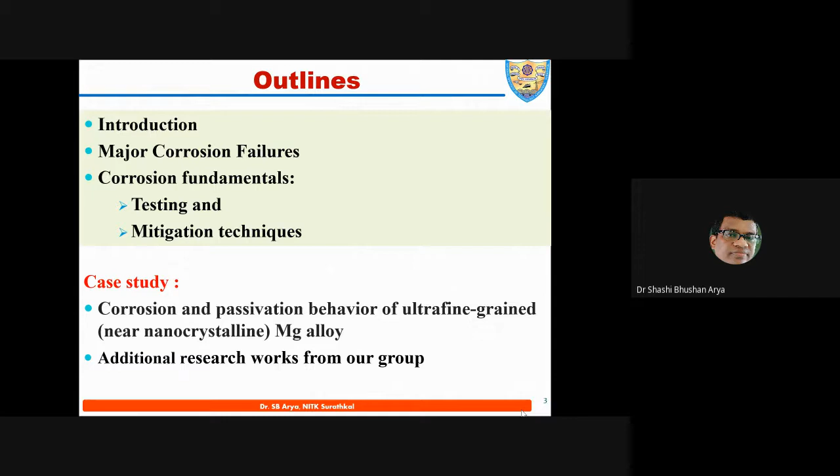So the first part is the introduction. I'll try to make you more interested. Please forgive me, not everything is from the magnesium corrosion point of view. I am giving you more iron free of cost. Iron is equally important as magnesium. People talk too much about magnesium. Magnesium is very demanding, no doubt.

Everybody is working in the metal area. Magnesium is very demanding, a hot cake nowadays, for various reasons already given by the previous speakers. I will talk about it a little later, but I would like to correlate the corrosion problem of magnesium with respect to iron, why we are still using iron. I'm trying to connect both.

When I'm giving the example of corrosion of iron, it means corrosion of magnesium in a similar way when you talk about the science or technology point of view. So first part, NITK Surathkal, as I told you, is very close to the Arabian Sea. Okay, and we have our own beach. Those who have visited this place know one of its beauties is our own beach. But I'm not going to share about the beach; I would like to share about the corrosion perspective.

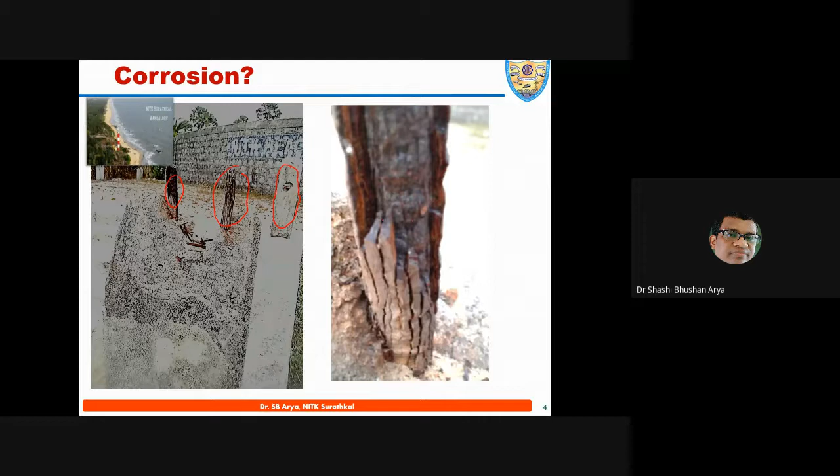So in this particular case, the steel, because you know that a concrete structure is basically a composite structure. Concrete means cement and other admixtures, and then we put in the steel called TMT, thermomechanical treated steel. And this is the TMT steel. You can see the brown color if you go closer, and this has typically got corroded. So steel is really challenging for the industry and the society.

But you know what is the best part? This particular steel is very economical. We cannot compare steel with magnesium alloy. Steel is around 50 rupees per kg, or say 100 rupees per kg even if you go for good quality, but you are not going to get magnesium alloy at 100 rupees per kg or even 1000 rupees per kg. So most of the time, society uses steel or modified steel, and that's why we have more examples of steel corrosion, and you mostly don't see corrosion of magnesium in real life. Components are there, they are failing, so we will discuss it a little.

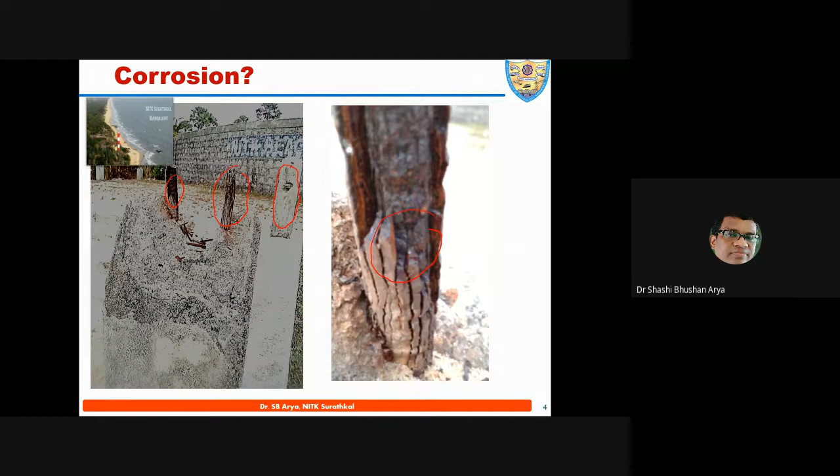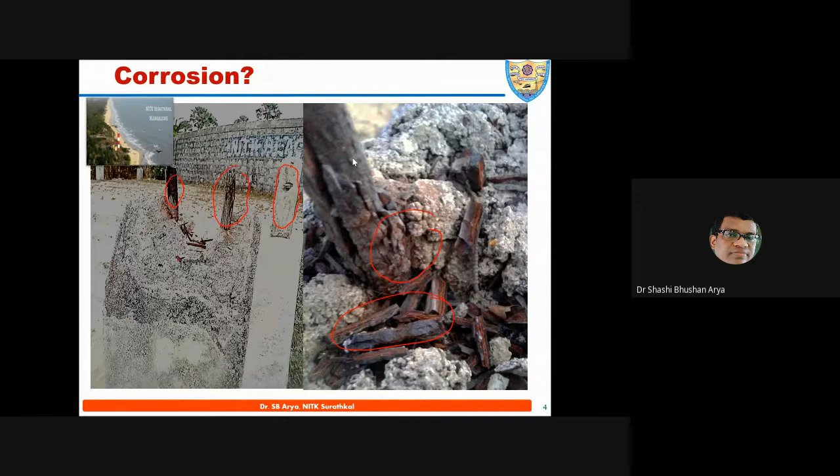Now we have to concentrate on this problem. You can see it has typically got corroded, and why I'm sharing this with you is the possibility that this steel gets damaged totally, and then the structure is also going to give problems because of the expansion. When the corrosion product forms, it will destroy the nearby concrete, the interface, and most of the time the damage or failure of the concrete system takes place in this manner. Now imagine, the coastal belt, the Arabian Sea, chloride environments, we call it a very aggressive environment, and how to control this steel is a major challenge. So we'll see how we can do it, and I'll share some photographs of real corrosion problems.

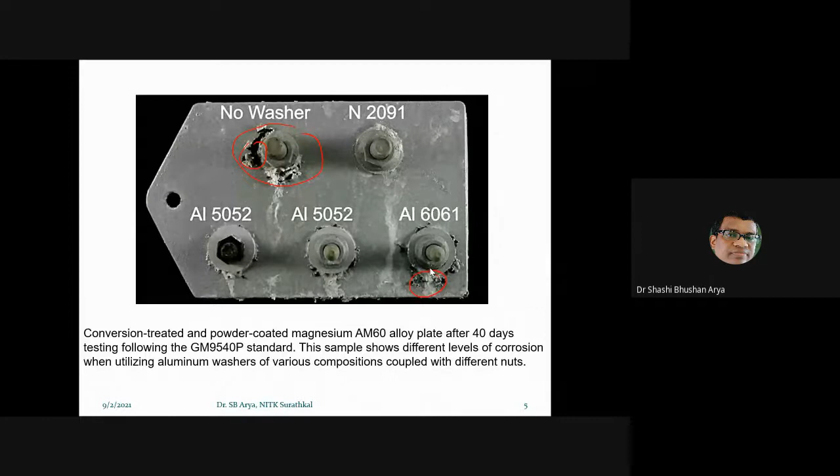Some aluminum, and magnesium I added at the last moment. Generally I'm not taking this one, but because the theme is magnesium, we'll talk about magnesium corrosion. You can see this magnesium product; they used some aluminum, so there is a possibility of galvanic corrosion. Because of corrosion problems, most of the time non-ferrous metals, especially aluminum, magnesium, nickel, etc., will fail for various reasons. We'll discuss completely the possibility of this type of failure or corrosion when it comes into the real environment. Another one is a cast magnesium alloy. It also failed.

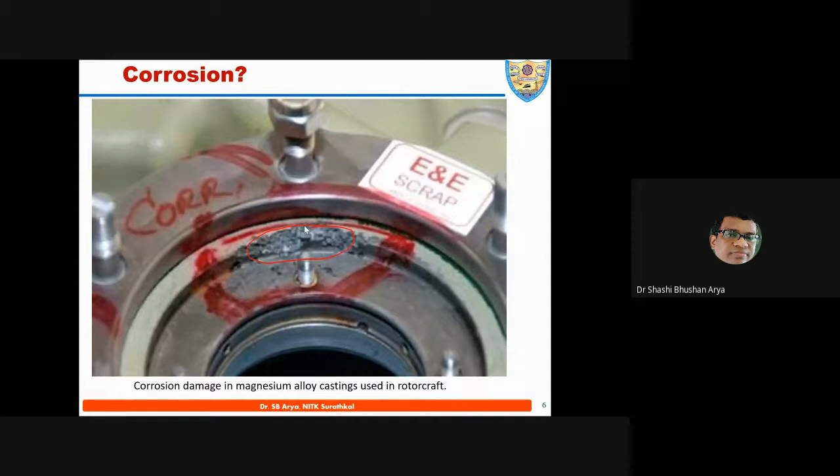So this is the case when you talk about the corrosion problem. I'm not only talking about steel; I just added the magnesium examples. Okay, so corrosion is a real problem. We'll see how it can be tackled. We have to take care. You know this particular problem near the window: Maruti 800, or the Alto, or many cars in the automobile industry, typically get corroded, especially near the window, because the gasket is there, and we call it crevice corrosion.

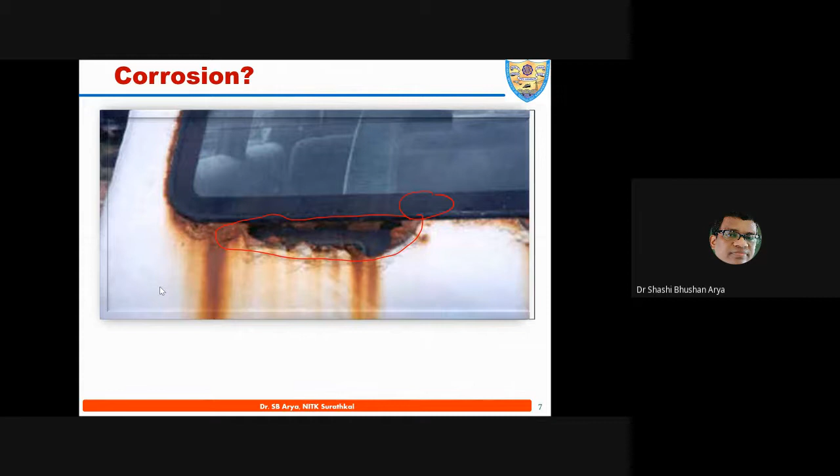Okay, the corrosion: typically when you insulate more, it will corrode more actually. So how to protect that will be another aspect you are going to protect, but even though it is not, somewhere in an undercover area there will be more corrosion. You can see this problem.

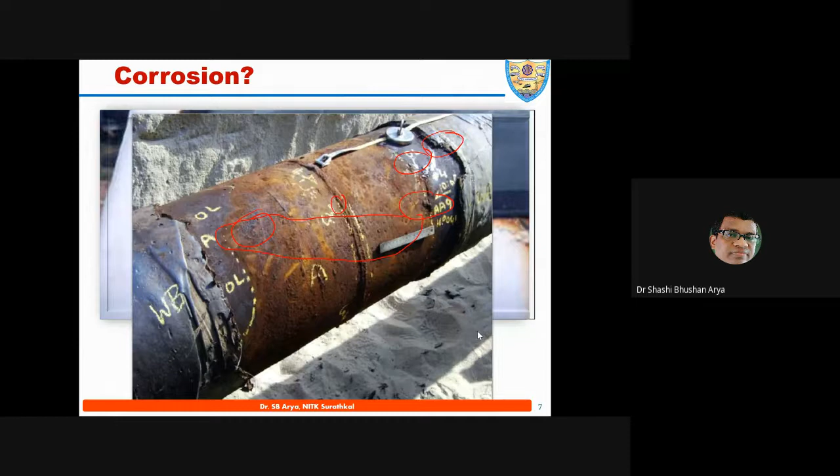You know, you are using a lot of mobile phones, a lot of laptops, or all the electronic instruments. They are made of printed circuit boards. Okay, and nowadays printed circuit boards are very, very micro level, microchips actually, but they contain a lot of electronic products.

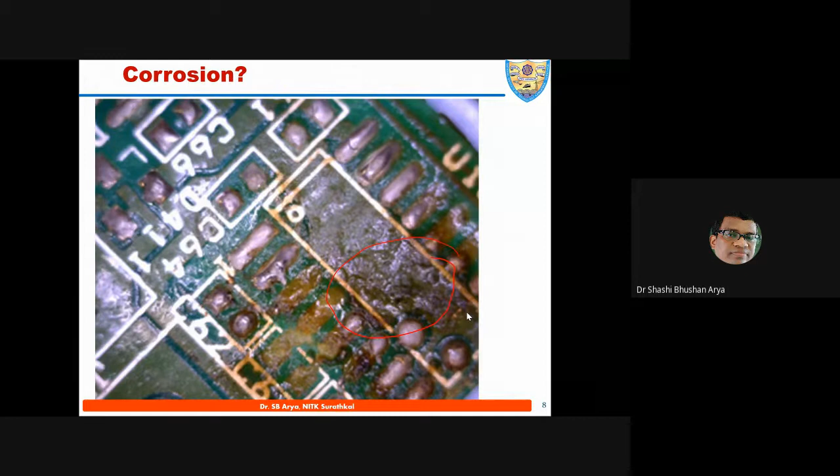In this particular condition, you can see here how this particular PCB got damaged because of corrosion, because of the humidity, because of ingress of some air or water mist. So mostly this corrosion problem will always be there, even in the high quality printed circuit board.

It's a heritage bridge. It is a UNESCO declared heritage bridge, and it is one of the marvels from the civil engineering point of view for maintenance in a highly aggressive environment. It is called the world's second most aggressive environment for a bridge or product which is going to survive. But the problem is there when you talk about the corrosion aspect.

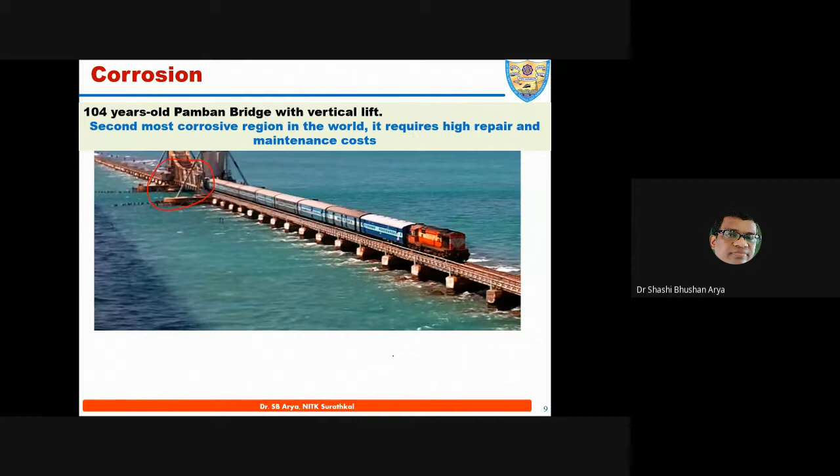As I told you, the sea and ocean are the real challenge because they consist of chloride ions, and the chloride ion is a very, very aggressive ion for corrosion. Okay, so this is the case. I'll just share with you some more near to this bridge. This is the corrosion problem.

It comes under Southern Railway. Southern Railway is maintaining it well, but still they want to change this bridge completely with stainless steel. Now they are using steel, and they do a lot of coating and paint, etc. Okay, so with this bridge, if you look closer, corrosion is the problem, and you require high quality maintenance.

And you know, when the train crosses this Pamban bridge, the speed is hardly 5 km/h, very slow speed, because they cannot take any risk, because this structure is under threatened condition, and it is a little bit damaged somewhere, but it is not revealed. So speed will always be very low, so that there is no chance of any fatigue or any type of vibration damaging this bridge. Okay, but it is well maintained.

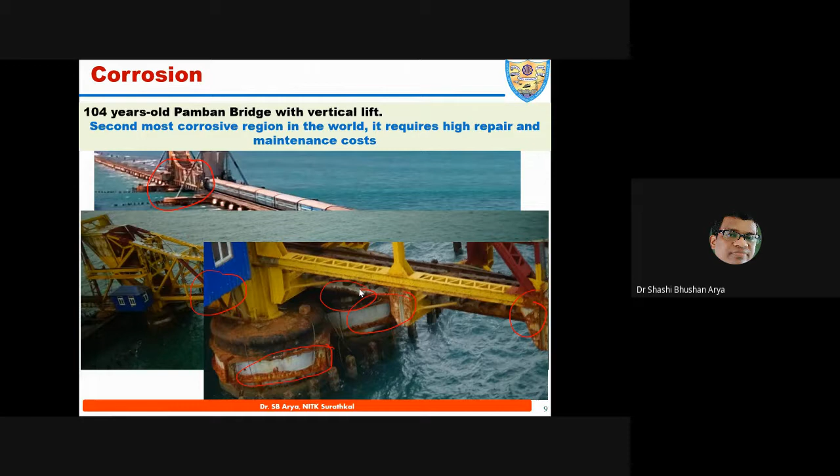As I told you, it is a UNESCO heritage, and still we are preserving it. And now the government has allocated about 100 crores to change this bridge to stainless steel. I'll share something more on corrosion failure. Corrosion failure happens when you ignore it, and that's why I'm giving you some lectures which are very important.

At least you have to consider the corrosion issues in the component. Whether you are making any composite or developing any alloy, what is the possibility of corrosion? And when you ignore the corrosion problem, the disaster will be much higher.

You know what is the reason for this failure, this tragedy? It is typically the ignorance of people or the maintenance engineers in that particular company. That company was run by Union Carbide.

The same Union Carbide is an American-based company. The franchise was taken by one of the Indian industrialists, and now they're doing the business in India by the name Dow Chemicals. It's a famous company. Earlier the head office was in Pune. Now it has shifted because of agitation. Now most probably it is in Gujarat, somewhere in Ahmedabad or maybe Gandhinagar actually.

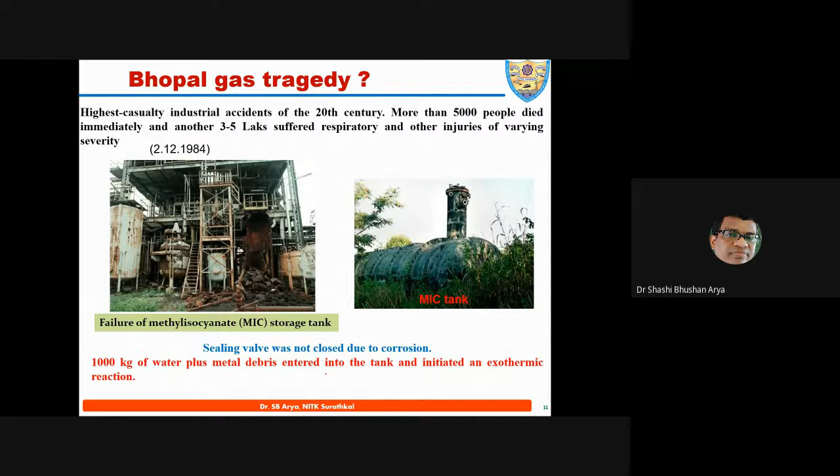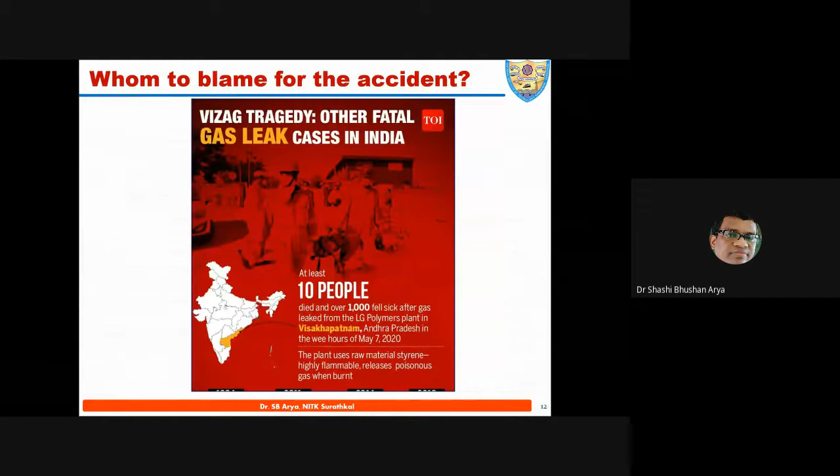Because of not properly considering the corrosion issue, this problem happened, and that is the biggest disaster of the 20th century. A similar case happened, if you remember, last year also in the case of Vizag. But till now we don't know whether the failure is because of material failure or some other type of failure. Nobody knows. Till now the data is not in the open market. So corrosion is a typical problem which we cannot ignore.

If you remember the World Trade Center, and now the Taliban came, people remember the World Trade Center, and we know about the attack by the aircraft. It is typically a corrosion problem. A big concrete structure, more than a 100-story building, the Twin Towers. It was one of the great buildings. A lot of commercial business was taking place worldwide here. So here the attack was there.

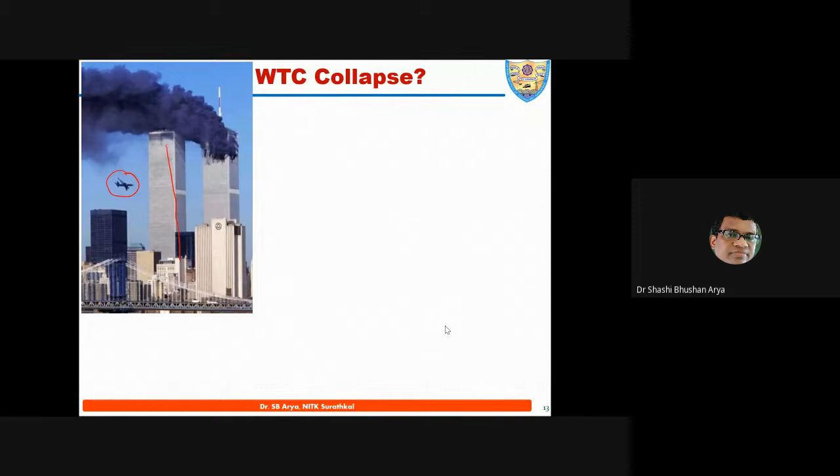The problem is, when people investigated properly how this building, a concrete structure, collapsed within 1 hour, the reason could be a metallurgical failure. The reason is corrosion failure. Corrosion is not like what we talk about from the water point of view. Here it is high temperature corrosion, we call it oxidation or hot corrosion. So I'll just share with you, the aircraft was containing a lot of high quality fuel with sulfur.

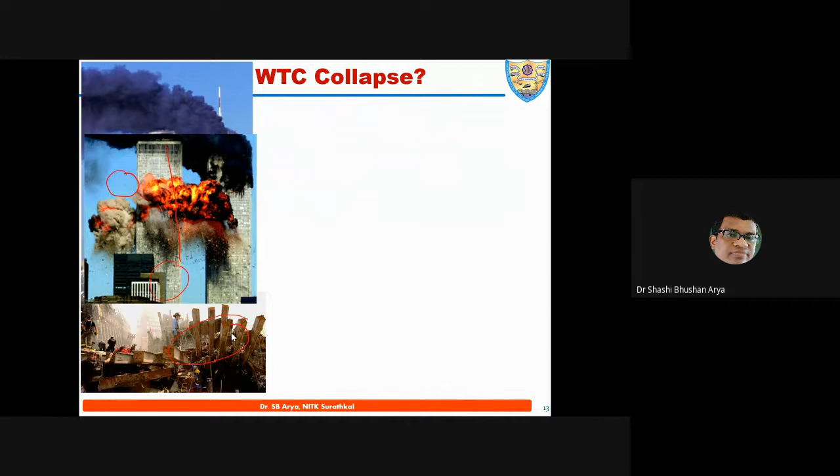When it impacted, a lot of dust particles were isolated, and as I told you, the concrete structure is manufactured with cement and admixture, and steel. Inside, steel is there, and as I told you, this structure within 1 hour completely collapsed. You can see only debris, ground zero. In that particular case, steel is everywhere, and when temperature got high, up to 400 degrees centigrade steel has no problem from the strength point of view. You can see the strength ratio on the y-axis and the temperature on the x-axis.

When the temperature increases to more than 400, then softening will start. The inside temperature was quite high, and the steel inside this concrete structure got softened. When it got soft, the load bearing capacity of the composite structure, who will take care of it? Reinforcement. When the reinforcement is under problem, the damage will be much more, and that's why it happened. The World Trade Center failed because of, one, the high temperature, second, the sulfur and iron reacted, reached the grain boundary and formed iron sulfide. They assisted more failure.

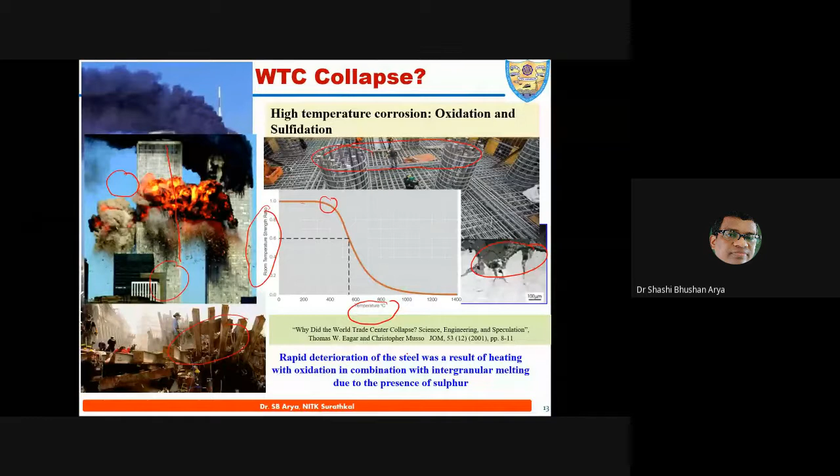This is a well documented study published in the Journal of Materials by one of the researchers at the Massachusetts Institute, MIT, and they published 2-3 volumes continuously. Hopefully, you remember this movie when it came in 2012, not 1912, but the disaster happened in 1912. This is a great movie, very popular because of the cinematography, the good picturization, and the director of this movie actually made the documentary.

He's making a lot of documentaries on archaeology, especially marine archaeology, and that's why he got the idea to make this movie. That's why it is a great movie. Before this Titanic movie came, at least 12 Titanic movies came, but none was a super hit.

The ship hull was made of steel, and when it impacted the iceberg, the speed of the Titanic was quite high. Unfortunately, about 100 miles before, another ship had given a lot of information about the iceberg, but the captain ignored it because this was an extraordinary ship for that period. They wanted to create a record journey from UK to USA, so the speed was higher and they ignored many warnings.

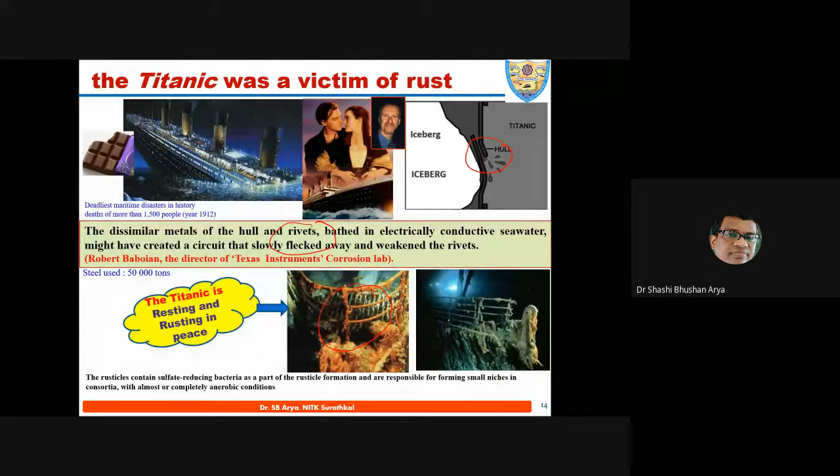Now where is the Titanic right now? It is under a marine archaeology department. They are taking care of it, but there is a lot of microbial attack, microorganisms eating the steel. So it's estimated to last another 50 years or so. This is the typical failure - the Titanic is rusting, or you can say resting, in that particular place.

Now you know corrosion is a real issue, but there are more challenges in sea areas. If you see the Indian map, it has a huge coastal area. From the Arabian Sea to Bay of Bengal, from Calcutta to Odisha, or Mumbai to Gujarat, we have a huge coastline, and this is a challenge for corrosion.

What material we can use, how to avoid corrosion problems - this is a severe zone of corrosion, and in some areas corrosion is much more severe.

Now corrosion is another problem when you talk about the Indian map from a demographic point of view - it's pollution. Because heavy vehicles, automotive industry, automobiles are in very high quantity - two-wheelers, four-wheelers, three-wheelers. So carbon monoxide gas, sulfur dioxide gas, all these gas components are in the environment, and that gives the biggest problem for corrosion in central areas, plain areas, or riverside areas. So corrosion is always dominated by various factors.

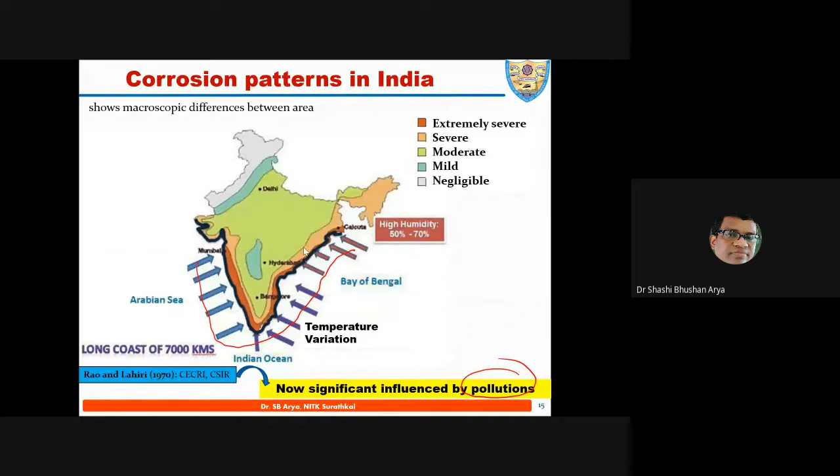So this is the case when you talk about the possibility. One book I read is called 'Rust: The Longest War.' It's written by a very well-known personality in the technology field - he's basically a photographer actually, his name is Jonathan Waldman. It's a very good quote - what he wrote, rust is the longest war.

Why? Rust is a continuous phenomenon for materials. You can say World War One, World War Two - so many wars happened, but there is a specific time for them. Corrosion or rust is a continuous phenomenon - materials are failing continuously with nature. People working in industry, you know small scale industries use boilers, heat exchangers, and so many components. It is told this relates to the Bhopal gas tragedy.

This is the longest war, a continuous war against corrosion. What we can do as a teacher and researcher is build up trust by giving corrosion awareness programs, so people know that corrosion is a real issue. That's the way I'm talking to you about corrosion awareness.

In Hindi, rust is called jung. War, if you remember, is also called jung. So jung se jung mera jari rehta hai - because I'm always doing research, always teaching. Before this lecture, I already took a corrosion class for my BTech at NITK. I continuously give invited lectures at international or national platforms - this is important for corrosion awareness, and finally, building trust against the rust.

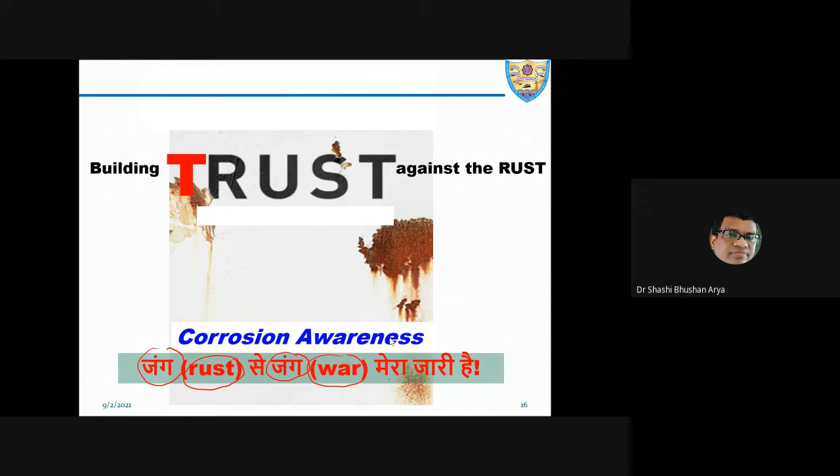Now come to some fundamentals. What is the case, why does corrosion take place? How does corrosion start? How to make good steel, how to make good material, how to make good alloy, or how to avoid it if the environment is not suitable?

This is the way corrosion happens, but I've given it differently - this is called ion. Corrosion is dependent on ions actually - what is ion? Ion is nothing but environment. Like seawater, that is NaCl. When you talk about chlorides, hydrochloric acid - these are all ions, chloride ions. We talk about H2SO4, sulfuric acid, sulfate ions. Various ions are there, and these ions create the problem of corrosion, my dear friends.

This is the case of possibility of corrosion - I'll give you some more. Corrosion is nothing but deterioration. In broad terminology, even the body gets deteriorated. When some problem is there, the color of the human body will change, the brightness is not there. When you go to a doctor, he will use the same terminology - the body is deteriorating, either by color or some other way. Similarly, metal is corroding or changing color by reaction with the environment.

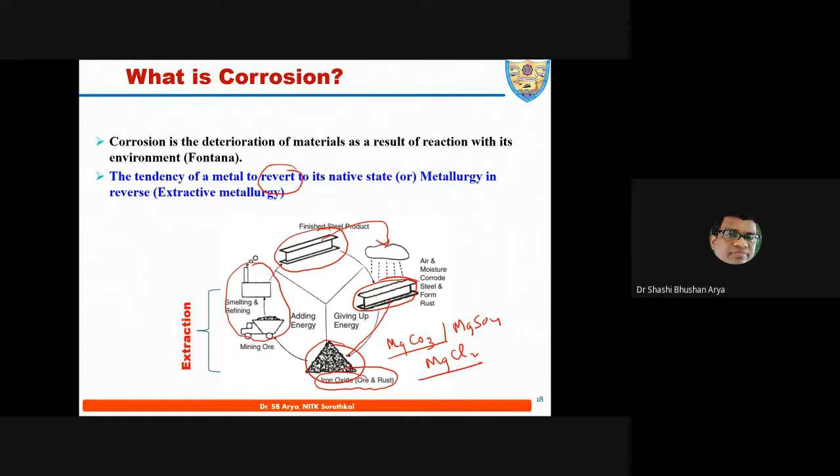So anyway, I'm not discussing the extractive metallurgy of magnesium production, but corrosion. When you talk about simple corrosion, it is from an electrochemistry point of view. It requires one anode, one cathode, and then you require the electrolyte, like a battery, like the battery we use in a torch. A Daniell cell, okay. So in that similar case, corrosion is a small cell, and that's why cell is a very important factor where we require anode and cathode.

In corrosion, sometimes suddenly a metal, because of some various reasons, becomes anodic, and the other reaction will be cathodic. So what is the requirement? Anodic reaction, where metal gives you metal ions, is called oxidation reaction. Another reaction is called cathodic reaction, called reduction reaction, which is 2H plus 2 electrons coming from the environment. You can say it's a reduction reaction. There are so many types of cathodic reaction, and all these cathodic reactions operate the corrosion.

According to charge balance, every anodic reaction, if you talk about the summation of oxidation reaction, OR, is equal to the summation of reduction reaction, RR. Oxidation reaction is nothing but an anodic reaction, and cathodic reaction is nothing but... so if total cathodic reaction is suppose higher, then obviously the anodic reaction must be higher to balance the charge, because we cannot create charge, we cannot destroy charge. Charge can only be transferred. This is law of charge conservation.

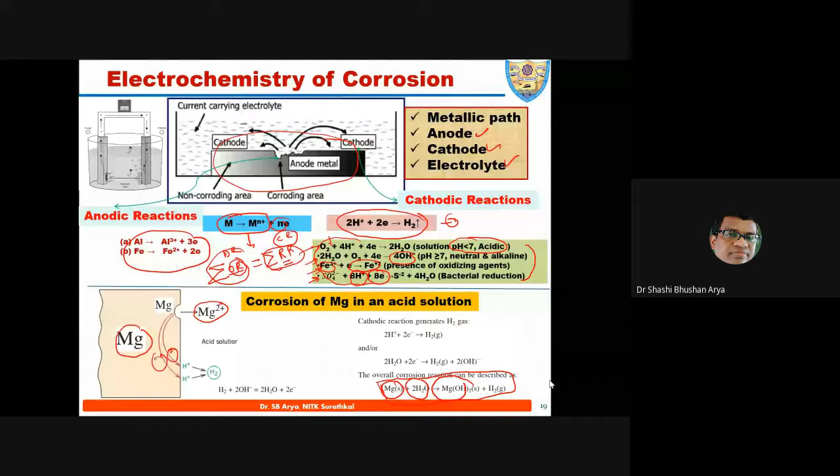So finally, if you talk about the corrosion of magnesium from the electrochemistry point of view, or simple cathode, what is called uniform corrosion point of view, magnesium reacts with water, giving you magnesium hydroxide, and this magnesium hydroxide converts into magnesium oxide. So that is the simplest way of corrosion of magnesium or any metal, even including iron or aluminum or anything.

But corrosion is dependent on various factors. So before going into anything, we always try to understand thermodynamics. That's why thermodynamics is more important, because it will tell us whether the possibility is going to take place or not.

That's why, if you remember, in your basic 11th class or 12th class, there is an EMF series. And nowadays they have even started it in the 6th class CBSE book. And the CBSE book is the best book, because every year or every 2 years they are transforming. So what is the possibility? The electromotive force series is there.

You see, the metal in the bottom area is more electronegative. It means there is more tendency to dissolve or give the ions. Magnesium gives them easily compared to even iron. So if you compare the EMF series from a thermodynamics point of view, magnesium is the worst in this series. Then aluminum, zinc, etc. That is the biggest challenge for the product manufacturer.

But it can be sorted out when you add some alloying element. We'll discuss that a little later. So this is the case: magnesium is a problem. Then mostly, as I told, corrosion of iron. So this is the EMF series they built long back, by Faraday and group. And in this particular case, they have taken pure metal. This iron is pure, magnesium is pure.

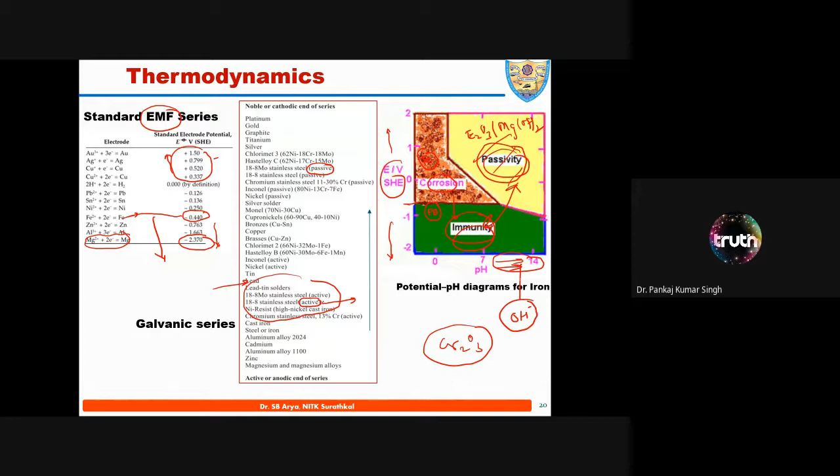Yes, Sir, you have represented here 18-8 stainless steel. In the upper portion, it is passive. In the lower portion, you are representing the same thing as active. What does this mean? 18-8 stainless steel active. Actually, active condition, when you put the metal, immediately it will give corrosion. Active corrosion means more corrosion. That's why the negative EMF series.

When you go to the bottom, potential negative, lower side, there is a chance of more dissolution, means active dissolution. So here they have written active, means corrosion. But when it forms a film, then it is protective. It's called passive. Clear? I'll discuss. Don't worry. You keep your question yourself. But for a short time, it will give you corrosion.

That's why if you see this area is a positive potential, means your same metal is going towards the positive side. If it is there, means noble, means protection. Same metal, if it is active, means dissolution, it will go towards the bottom side. If there is film formation, it will go towards the positive side. Same thing I have written here, passive. The same metal will give you protectiveness because of film formation, and that film is called passive film. Don't worry, I'll discuss more on the film.

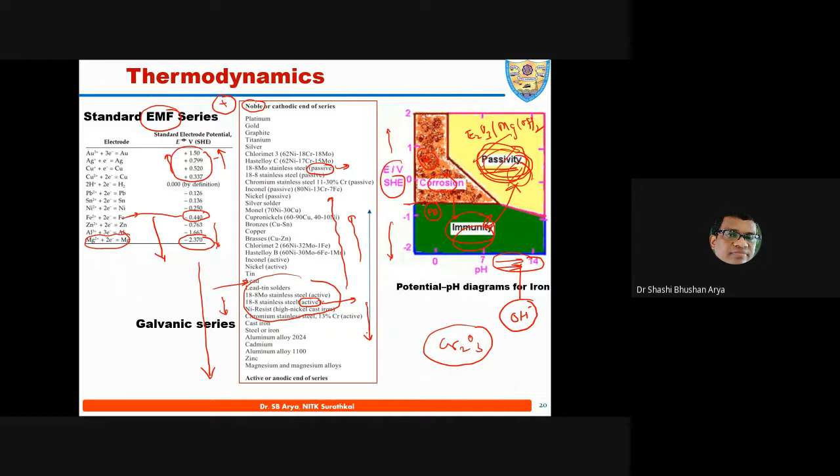Just keep in mind, this is going to be helpful when I talk about the kinetics of passivity. Very true in the present situation. This Pourbaix diagram is very true. As I told, this is the case of corona, means corrosion of metal, or the corrosion of corona is the human body. Now vaccines have come out, Covishield or Sputnik or Covaxin. If you take the vaccine, our body gets immunity, and that's why we require vaccination.

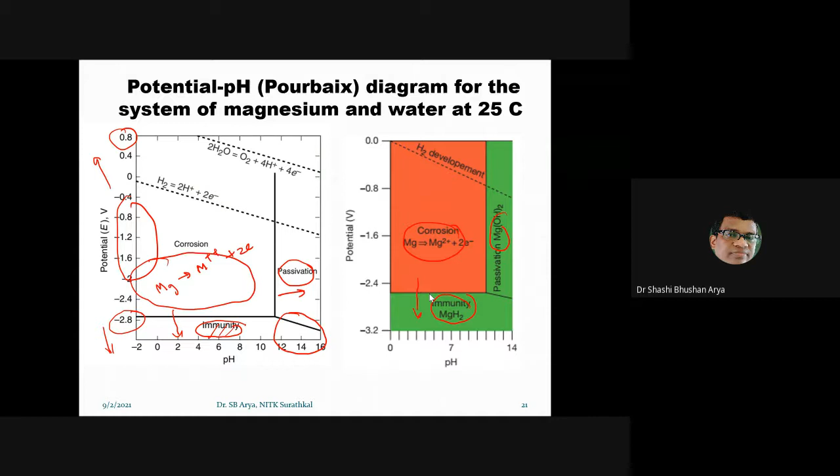One problem when you take an immunity dose is that it is forceful. When you go towards the downside, for any metal, we are using an external source to suppress this potential. When you suppress the potential, some problems will come in the metal also. Especially in steel, when you do cathodic protection, the material will fail because of hydrogen-induced cracking. Similar in our body: when you take vaccine doses, side effects. Maybe fever, fatigue, headache, and others. It is a common phenomenon because the natural body needs to develop antibodies against external forces.

So in the present condition, this Pourbaix diagram, at least in the metal, we know long back. We vaccinate our metal, but we know the side effect of this one. And vaccination is a rich business. It's economic, very high investment. It is not easy actually. So protection method is not easy, and that's why we avoid this one.

We try to make it by alloy method actually. We use some alloying element like I told you, steel. If you use chromium, it becomes very good protection. So that is the way when you talk about the possibility of this one.

Now the most important corrosion aspect is called kinetics. As I told, thermodynamics is just possibility or tendency. It's like the Intelligence Bureau of the Government of India, IB, or CID for the state government. What they will do, they will give a lot of information. Some attack will be there, something going to happen. So mob is there, so many problems are there.

So the Intelligence Bureau is only giving the information to the local police or local administrators actually. So only possibility, and they will give daily some message, something happening. But when it is happening, how it is happening, it is very difficult for them to tell. The kinetics work is done by police. The action is going to take place by the police.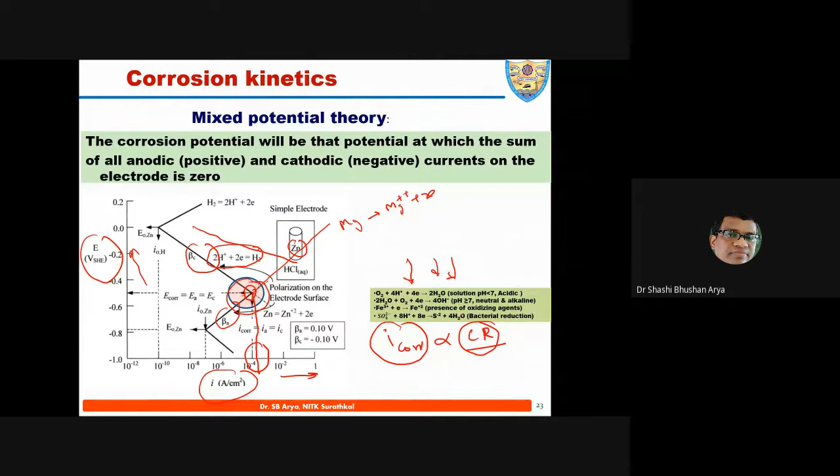So where this will intersect, this is called I corrosion, corrosion current density. And this corrosion current, I corrosion, is directly proportional to corrosion rate. By using Faraday's law, knowing the area and equivalent weight of metal, we are able to calculate this one. And then we can say the more the I corrosion, more toward the right hand side, the more the corrosion of metal. Okay, so this simple way in electrochemical engineering, we call mixed potential theory, to understand this phenomena by corrosion kinetics.

Very quickly, I'll go to the types of corrosion and then I'll stop, and please let me know the timing. Then I'll take some questions if you require, or I'll talk in more detail about magnesium and my own research in the second part.

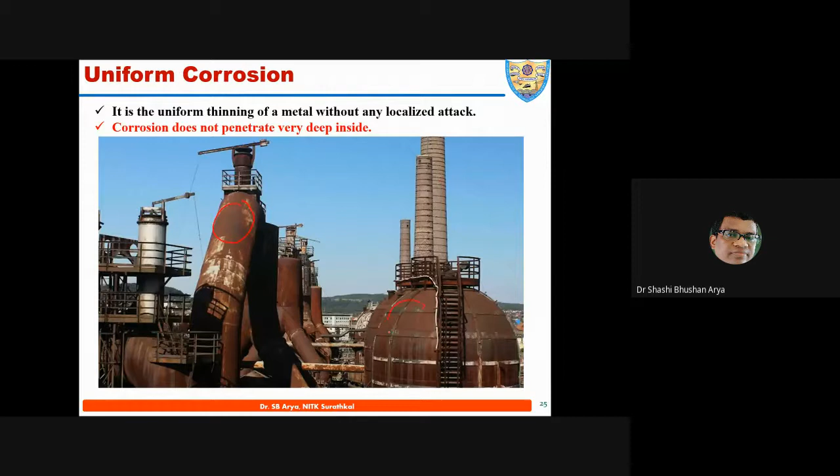So uniform corrosion, you know, in most of the industry you can see that one. Okay, and that is the biggest problem, uniform dissolution of metal. Magnesium, similar case, but as I told you, in reality it is not there, and mostly I'm not looking at that one, but I'll share with you in the case study. So in that particular case of uniform corrosion, dissolution will take place, thinning of metal will take place.

The biggest problem is galvanic corrosion; magnesium or aluminum alloy or any alloy will change. Galvanic means there is a possibility of two potentials. Suppose you connect a steel pipe and copper; you know the EMF series, electromotive force series I told you, iron is here, copper is here. Positive potential, negative potential. When you connect these, there is a possibility of delta E, and this is called activation. The gap of potential is called the driving potential.

So any two systems are there in your joining. If you do dissimilar metal joining, or you develop the alloy, there are two phases. Or if you do heat treatment, there are two phases. In that case, there is a possibility of a microgalvanic system, and most magnesium alloys are corroding because microgalvanic phases are going to form.

It becomes anodic. So in that case, magnesium is much more dangerous actually, because if you connect magnesium with iron, there is a huge delta E, more discrimination of potential. And if you talk about galvanic corrosion, the galvanic series or EMF series, there is very natural science information there for society. What is the discrimination of potential? Why does society get corroded?

If there is a gap in society, when there is too much rich and poor, then you know what is happening. When there is a religion fight, my religion is better than your religion, discrimination of potential. When the caste system, my caste is better than your caste, I'm more noble than you, more discrimination. Similar case with gender bias or any diversity, discrimination is there. Discrimination means corrosion, either galvanic corrosion or microgalvanic corrosion.

Similarly, pitting corrosion, pit formation. It is when the film fails, pits will take place, my dear friend. This is the skin. It's not pimples actually, it is pits. Okay, this is a pipeline; one area got pitted. You know the roads, especially in monsoon time, you can see the road condition. Typical failure because the film fails, dissolution is there, and it fails because of an extra reaction called the hydrolysis reaction. Inside the pits there is very low pH, hydrochloric acid. Because of that, the metal cannot provide film stability, and this pit formation will take place.

They are micro-level size pits, very deep, and that's why pitting corrosion is called a localized corrosion, but very dangerous. Uniform corrosion will give you a sign of color, brown color. Pitting corrosion will not give you any signature because of the very small pits, but deeper penetration, and that's why corrosion takes place in a very catastrophic manner.

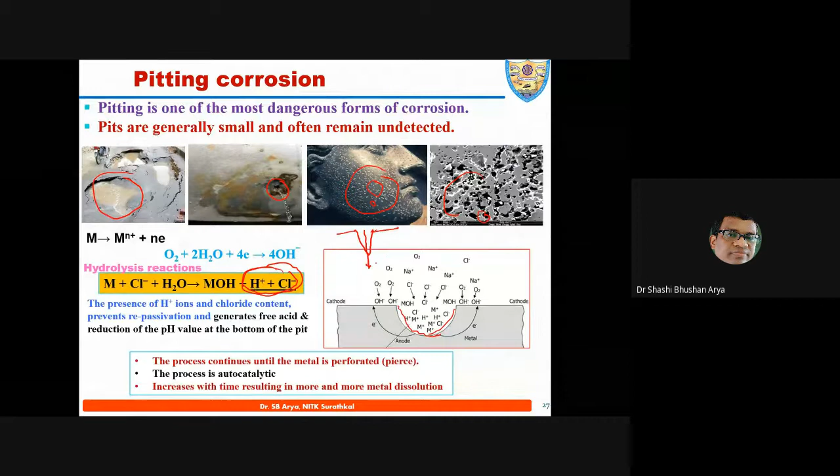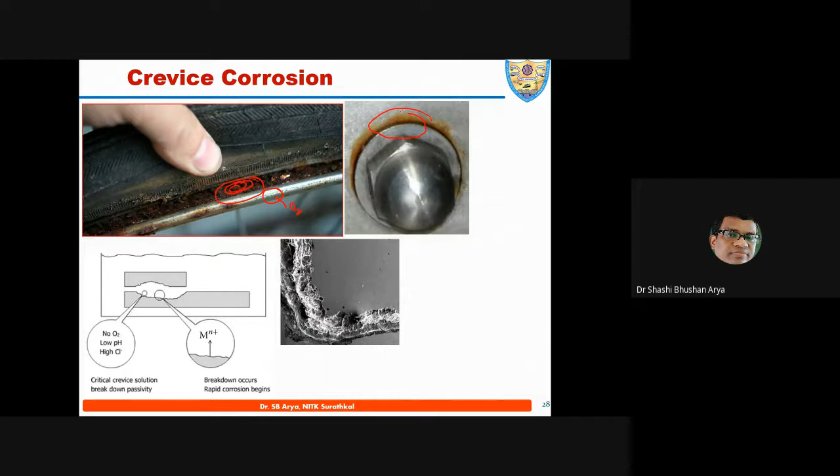Okay, crevice, I told you, oxygen. On the cycle rim, oxygen is there. Inside you see the rim is corroded. Outside, oxygen is in excess, so it provides some protection, passivity. But here there is no film formation, hydroxide or oxide. That's why the film is going to break, more crevice corrosion. If you do punching, fasteners, washers and all, the biggest problem. So these are crevice corrosion.

Similarly, stress corrosion cracking is there when the material is under a corrosive environment and under stresses. The combined effect is called stress corrosion cracking. And if the stresses are from the fatigue point of view, it's corrosion fatigue. If there are no stresses, it is called corrosion directly. If there is material and stresses, we call it mechanical failure. So the combined effect is called stress corrosion cracking, but under suitable conditions, environment and strain rate.

The moment you pull very fast, like mechanically, when you use the UTM, universal testing machine, doing the stress-strain plot test, in that case your material will fail. But stress corrosion cracking takes place at a very low strain rate or optimum strain rate. Otherwise, you cannot detect it.

So when you pull your metal, suppose this is your metal, when you pull from here and here by the sigma, a small crack will propagate. That's why material under this condition fails very fast, because corrosion and tensile stress create the biggest failure for this material. This is a magnesium alloy that typically failed during the test; even distilled water is dangerous for magnesium alloy.

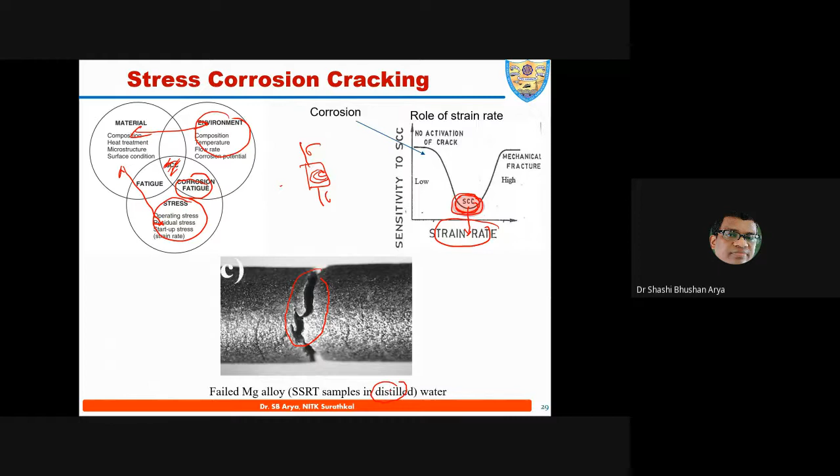And under the slow strain rate test, we'll discuss the methodology a little bit later, then we can understand the possibility of stress corrosion cracking testing. Similarly, the sensitization, intergranular corrosion, grain boundary. Similarly, in the magnesium alloy, lots of grain boundaries where the intermetallics precipitate out will also give you the problem. So I'll just skip, because these are the challenges in the stainless steel or steel market, or in the product, where the grain boundary, as I told you, is where the material becomes brittle.

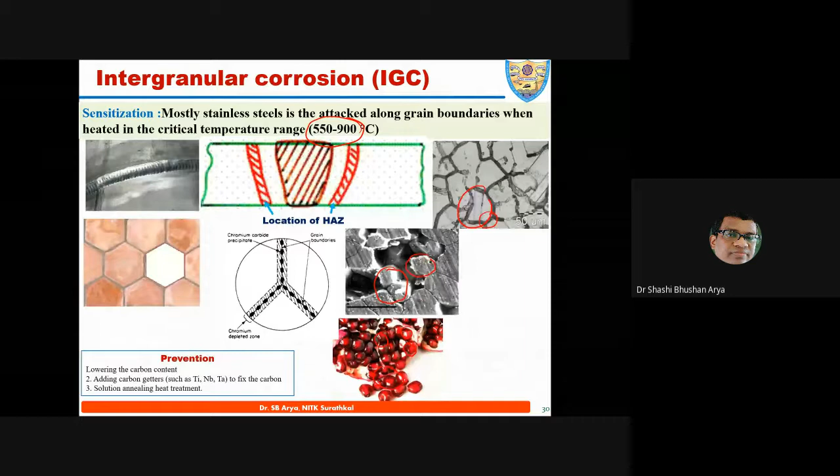Ductile metal, when it goes to low temperature, becomes brittle, as I told you with the Titanic failure. A pomegranate, when you peel it, you can see the single grains. And that is the case when you talk about the possibility of sensitization. When you do stainless steel welding at this temperature, it's called sensitized stainless steel. Because chromium carbide will precipitate out and that will give you a highly active area. This area becomes active, becomes anodic, and the rest of the grains become cathodic. And that is why failure will take place. So that is the way.

Another case, tribocorrosion. It is also important for the industry, where there is adhesive wear, abrasive wear, fretting wear. So erosion, sea erosion, is very common. Or river erosion in the monsoon or rainy time, or when they release the water from the canals, the submerged parts. So sea erosion will be there.

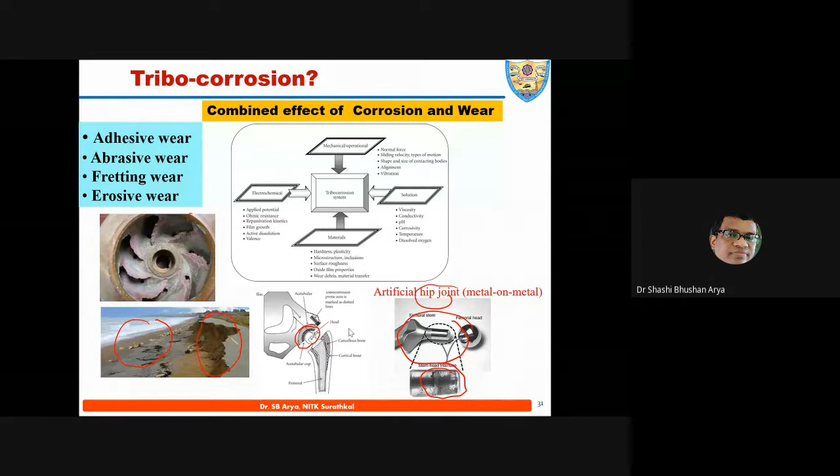How to protect? This theory is for the general protection point of view. You either do coating, or you change the design, or use some sacrificial anode. As I told in the case of iron, if you add a more electronegative metal like zinc, immediately zinc will corrode faster than the iron and the iron, the steel, becomes protected. Or do coating. So we are doing a lot of work on superhydrophobic coatings, or you use some inhibitor in pipeline corrosion. It will give you passive film formation at the surface so that the corrosive environment is inhibited. So that is the way when you talk about corrosion. That is the first part.

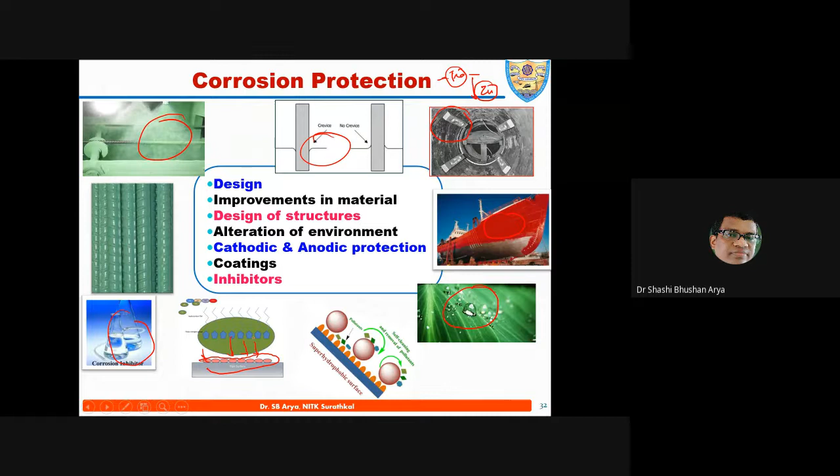Now I'll talk a little bit more about passivity. When you talk about the word passive, it is very difficult for a human being. Pessimistic is a very negative terminology: you are very slow, very sluggish. But from the metal point of view, it is very powerful. When I talk about passivity or protectiveness, it is the film. Like you know, what is called pickling. When you do pickling, essentially we are controlling the passivity. Or you do some alloy transformation, like steel to stainless steel, it is protective. Why? Passivity. So that is a very important part.

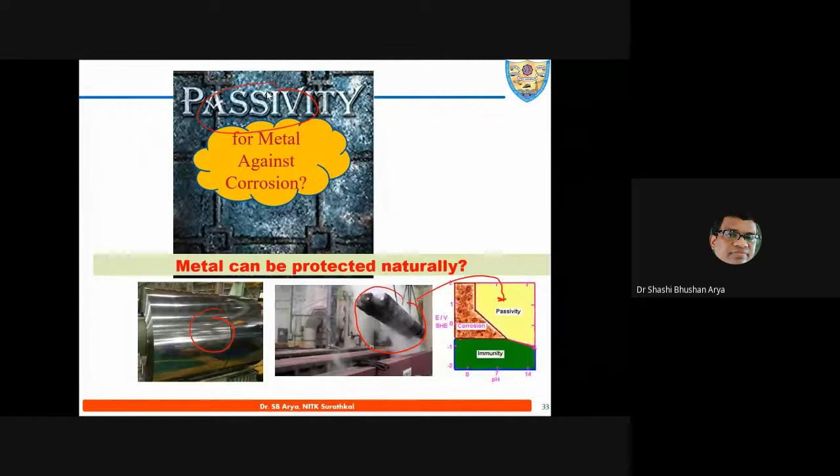Any metal or alloy can be protected when you improve the passivity of the metal by using alloying elements, either steel or magnesium alloy. When I discuss magnesium more, I'll share with you about the corrosion. So this is the simple case. As I told, the steel is there. You can see this is steel. When it comes into the environment, it gets rusted. You can see here, this is not corroded, it's protected, but here you see it's corroded. So this is chromium. If you use it, it becomes chromium oxide, protectiveness. So these are very powerful for steel. Similarly, some metals are there for magnesium.

You know Surf, when your cloth is dirty or has spots, we use Surf Excel or Tide etc. to make it white. It is the same with what is called stainless.

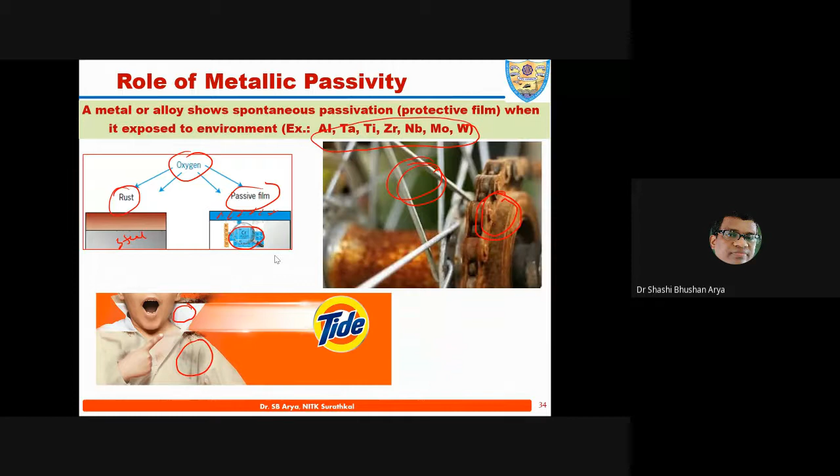This product, this cloth, got stainless means spotless actually. Similarly, with material, the alloy, if you do some proper design, you can develop it. Being a metallurgical engineer, we do all these things and we know how to develop the alloy and other possibilities so that it gives good protection.

Now the case of monitoring, how to monitor. In COVID time, this is very important. The pulse oximeter we require, and glucometer is there to know that problem. Blood pressure, TMT test, when you go to a cardiologist to check heart health, or if there's a blockage or anything, we have to do the testing.

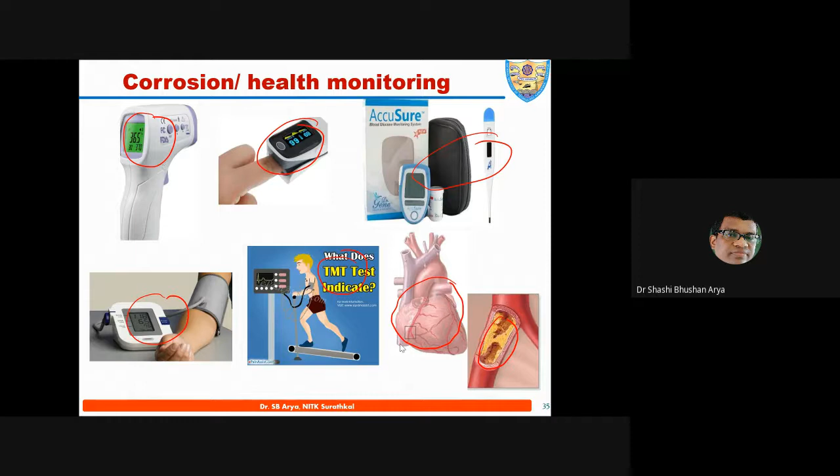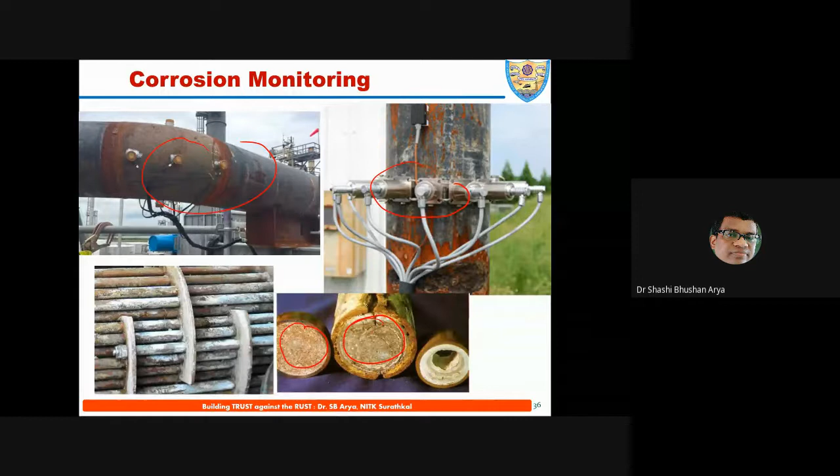Similarly, material or steel, when you talk about it, it is also going to talk about failure. So similarly, we do testing of material, how to monitor it. Online monitoring is possible. Blockage of the heat exchanger or boiler, if we talk about fouling, it is going to fail because you can see the blockage. So that is the case when you talk about testing. Various testing methods are there.

Salt spray bath testing method to understand, then corrosion testing. Now this is very important because when I talk about my case study, it will help you. This is an instrument-based method called potentiostat connected with electrochemical impedance spectroscopy, called a 3-electrode system.

What is a 3-electrode system? One is called the working electrode, which is the metal I am going to study. Then we require a reference electrode to measure with respect to some potential, like the EMF series I gave you, which is based on the standard hydrogen electrode. But in the laboratory scale, we use various types of reference electrodes like saturated calomel electrode, silver chloride, etc. Then the counter electrode, where the cathodic reaction 2H+ ion plus 2 electrons, if you remember, takes place. This is connected with the instrument called potentiostat, nowadays connected with impedance built in too.

So we measure the passive film characteristic. This is the active-passive transition called the potentiodynamic plot. The important part is that here we can calculate corrosion current density, and here we can calculate the passivity of the metal. Then similarly, with cyclic polarization, we are able to calculate pitting potential.

This shows how pitting potential works. If the pitting potential is higher, E pit or E breakdown, it means higher resistance of the alloy. And from the resistance or impedance point of view, electrochemical impedance spectroscopy is one of the tools actually.

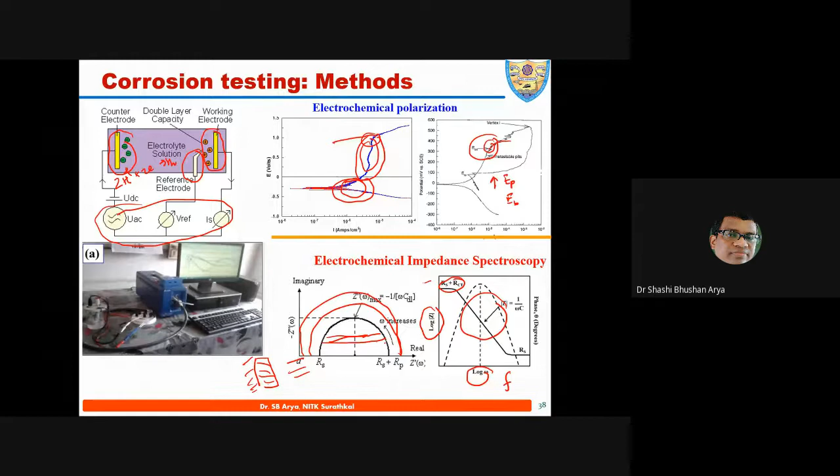So for short time, a smaller semicircle means more corrosion; a bigger semicircle means good resistance or good protectiveness. Similarly, this is called modulus of impedance, and this is called frequency, F or omega. We want to calculate the film's overall resistance. Higher the modulus of impedance means higher the film resistance, meaning more protectiveness.

So I, as I told, means corrosion current density. It is inversely proportional to this resistance, we call it RP, meaning film resistance, you can say. So this film resistance we are going to calculate. How much higher the film resistance, or RP, means lower the corrosion rate. I'm telling you in a very simple way.

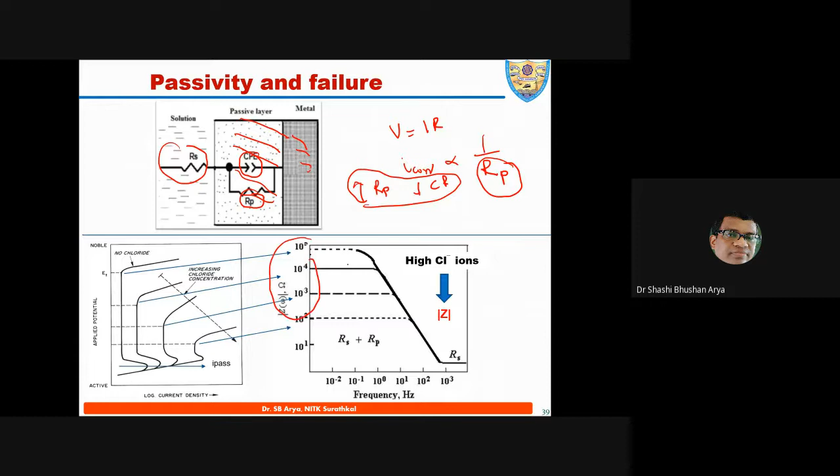Otherwise, this whole course on impedance is about more than 10 lectures actually. Similarly, from the modulus of impedance point of view, if it is higher modulus of impedance, there's more resistance; going to lower value means more reaction. Similarly, as I told, from the pitting potential or current point of view, you can see the breakdown potential decreases when you increase chloride concentration.

Chloride is a very aggressive environment. More chloride concentration means more reduction of pitting potential, and more corrosion current density, or passive current density, film current density. Please remember this terminology for the case study. So, either from the RP point of view or the modulus of impedance point of view, when you add more aggressive ions, more temperature, more destructive film conditions, it means reduction of modulus of impedance, reduction of RP value, reduction of pitting potential, or reduction of I passive value, corrosion current density — both are there.

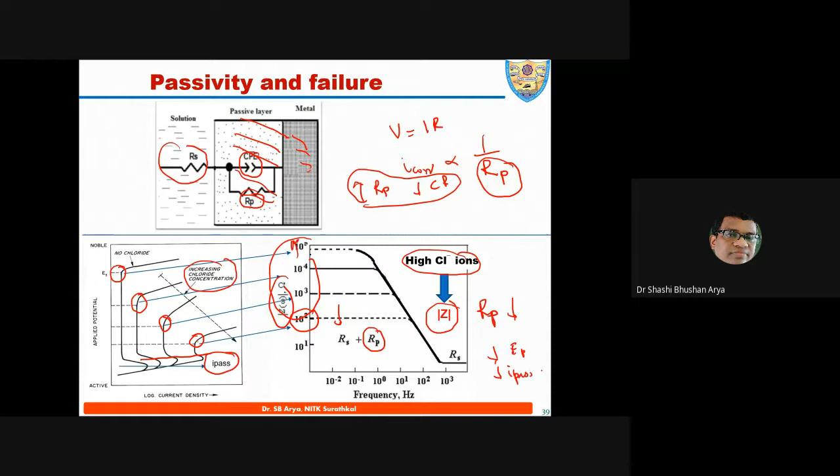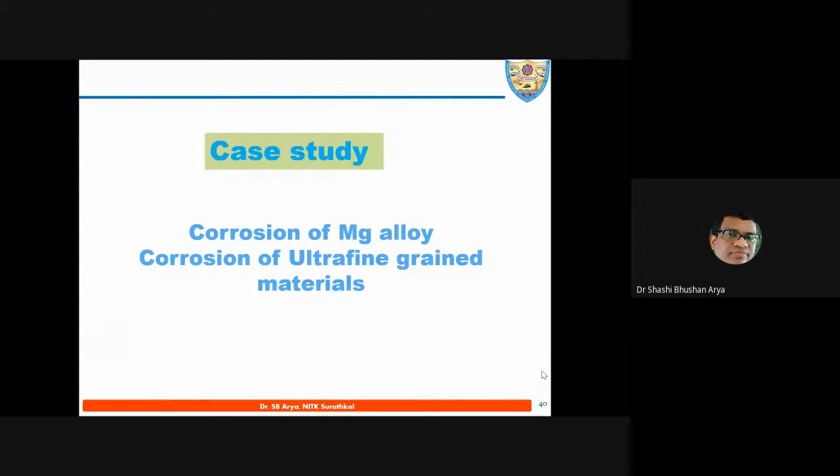So this is the minimum from my side for your case study. I'll stop it right now. After the break, I will start my real corrosion problem of magnesium and ultrafine grain material. Any doubts, please ask me. Otherwise we can take it combined with the final version, after completing the course.

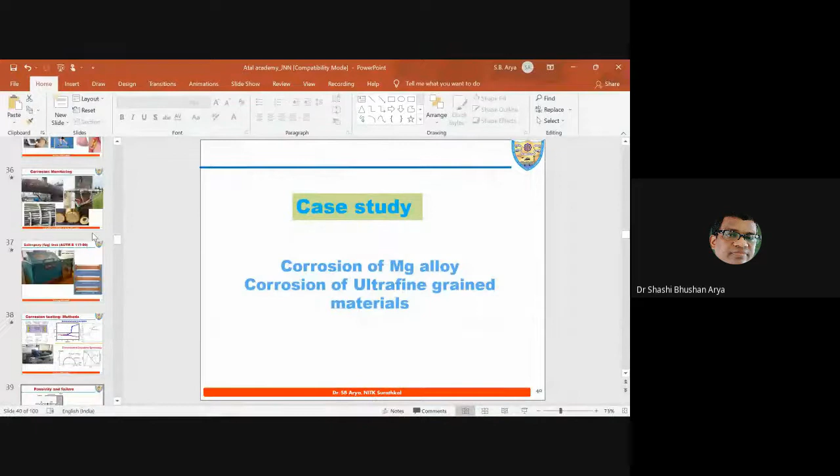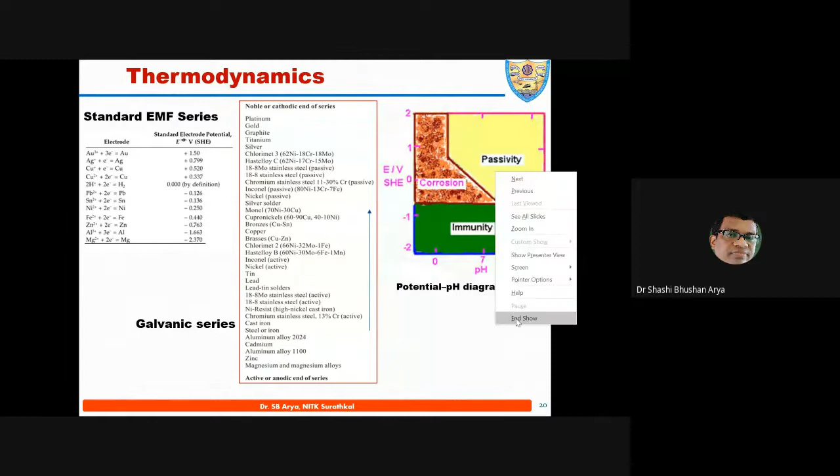Is it clear? Okay, anybody else? Maybe after the second lecture, I will discuss this thing further. Yes please, I'll be more happy. Thank you, yeah please.